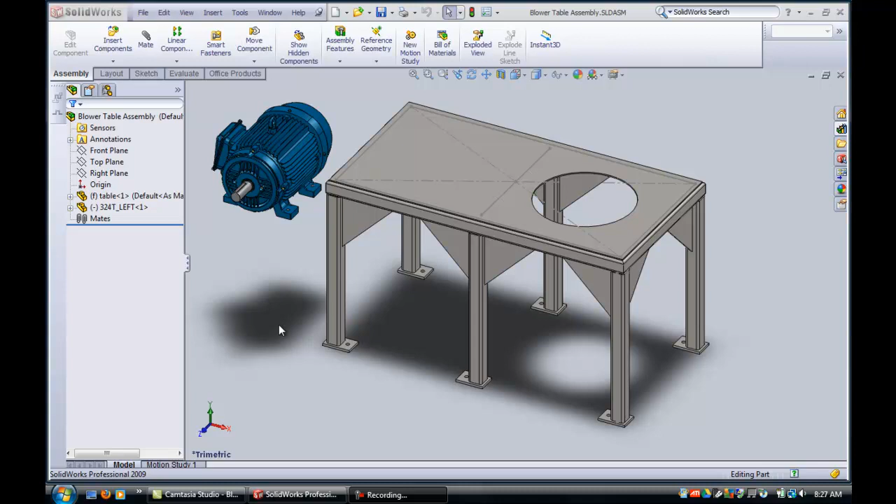Now, first thing we're going to need to do is find out what the measurements of the motor are for the bolt pattern. So I'll just quickly measure the bolt pattern of the motor, and we'll see we need 317.5 millimeters in one direction, and we need 100... and that didn't work very well. Let me just try that again, and remember to clear this time, and we get 266.7 millimeters in the other direction.

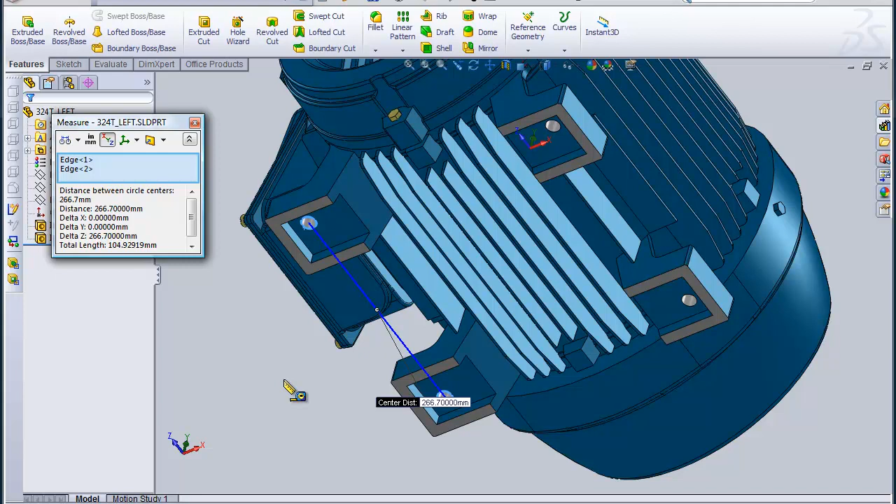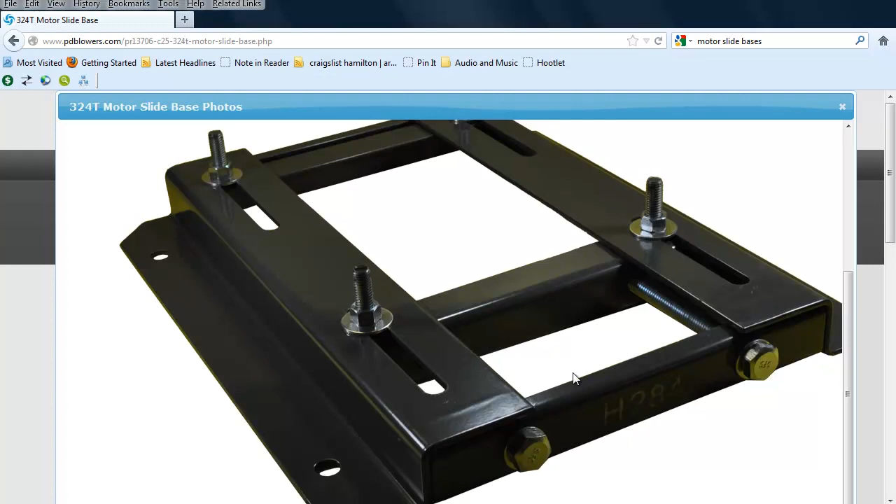Those probably translate to sensible inch dimensions. We'll find out soon enough. But in any case, that is relatively inexpensive, but I don't have a 3D model, so I'm going to have to create something to make use of in my assembly. So you can see that my motor dimension 317.5 millimeters is basically the center to center between these two bolts, so that's where my sliding has to take place. So I've got to start by modeling these Z-shaped pieces. Let's get started with that if we can.

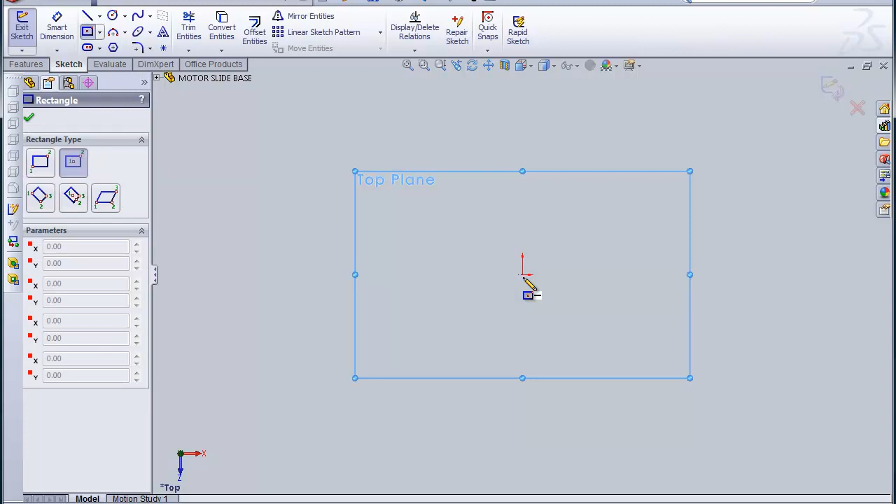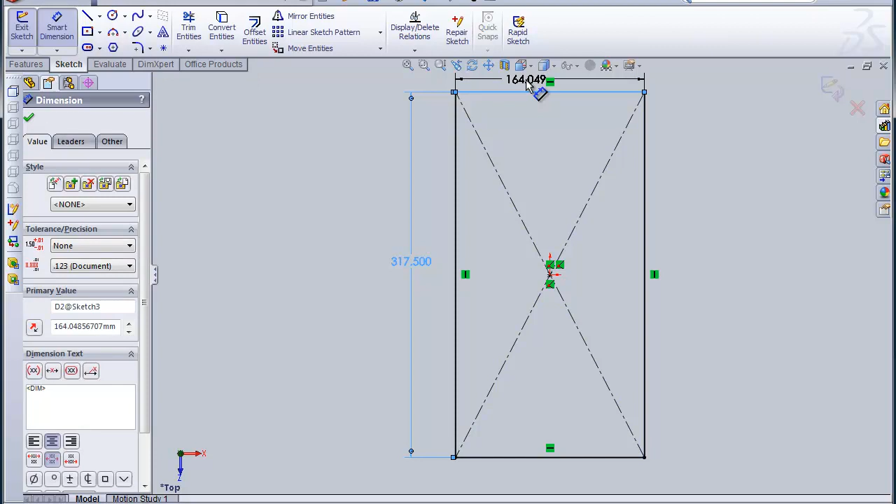Probably the easiest thing to do is to get on the top plane and just sketch a center rectangle and define that's going to be where my 317.5 dimension is. And that is going to be the other direction, which is 266.7 millimeters, and that gives me a framework for starting this base.

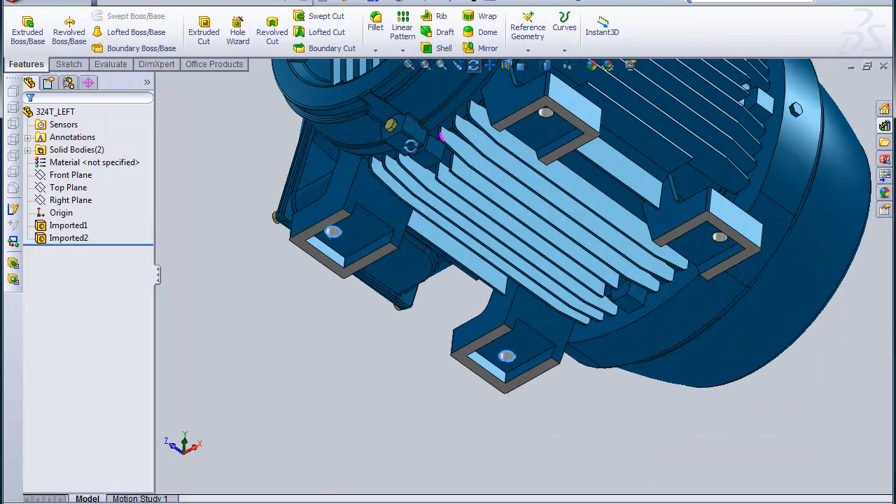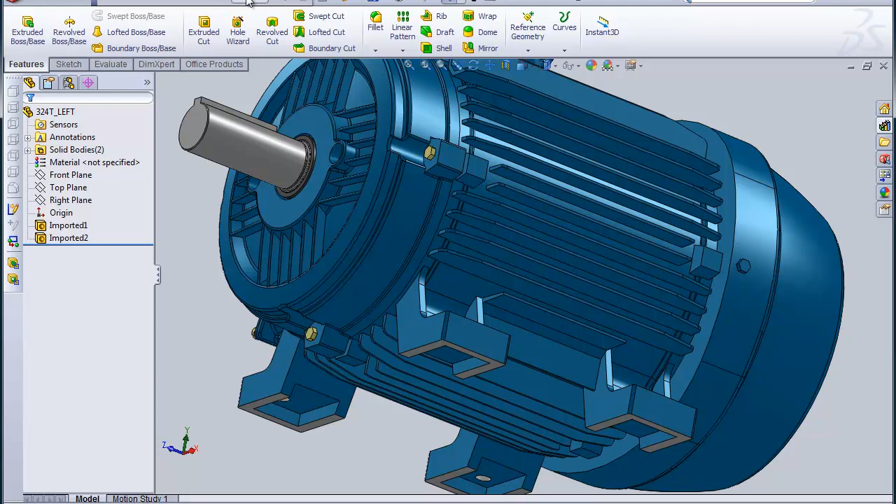So my sliding is going to take place along this line. I want to be able to slide the motor back and forth kind of like this, so I can tighten the belt. So that would be in the 317 millimeter dimension. So that's where my sliding has to take place. So that gives me an idea where to begin with my bracket line, and I need a slightly larger rectangle to define the outside of the base.

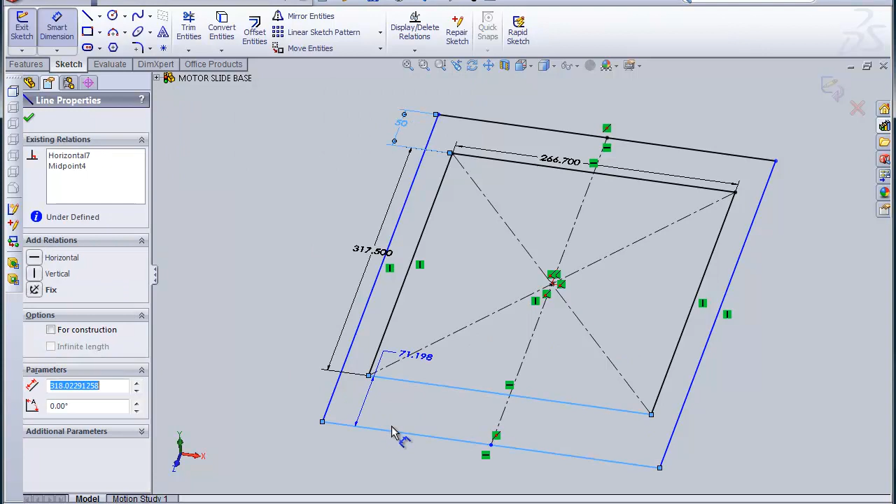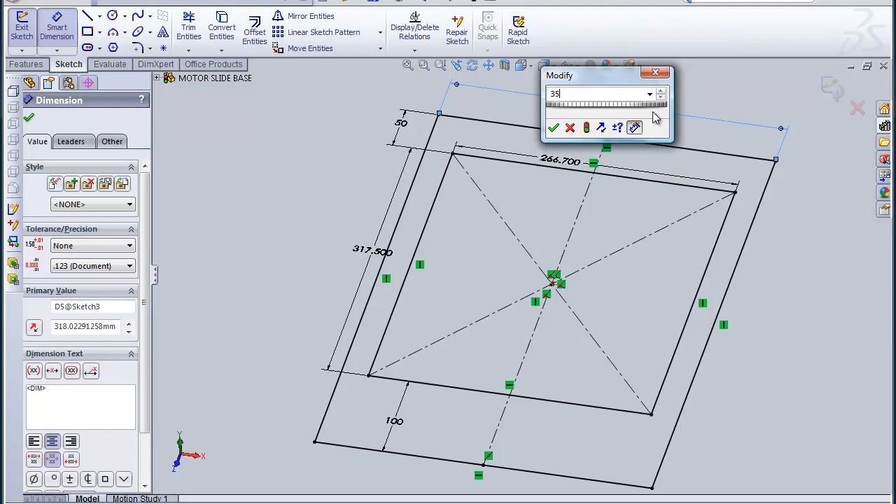So I'm going to need another rectangle, looks like that, and this is really just making a sketch to define the points I need to get started. So I'll just hit this line here and the origin, get those coincident, and later on I'm going to play with the dimensions a little bit. I'll just set this up as, say, 50, and need some room in the front for the adjustment screws, so we'll make this one say 100 millimeters. Okay, and the last thing I need is an overall width, and we'll make that something in the order of 300, 350 maybe. Everything's all black, so we can get going.

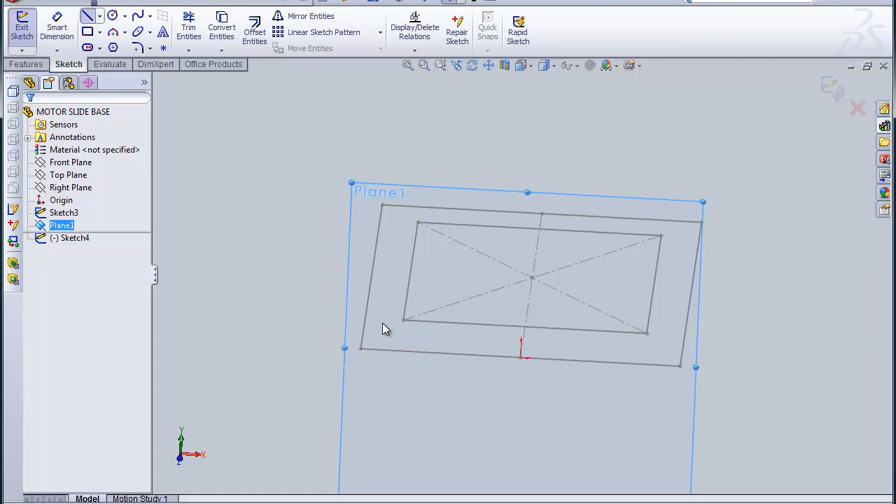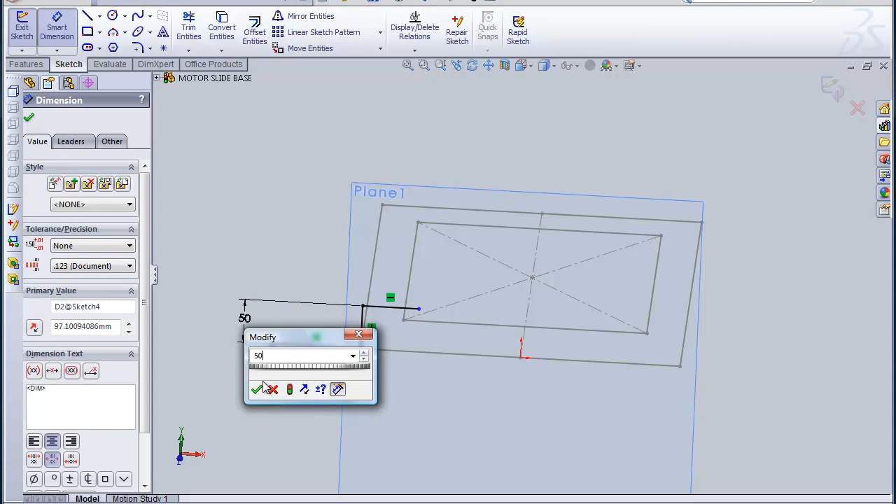Now, what I'm going to do is establish a plane off the front plane, insert reference geometry plane, and I'm going to pick that point there to define the front of my piece of metal, and sketch on that plane and draw the shape of the metal that I need. And that point there is going to be coincident. And my height looks to be about a couple of inches, or 50 millimeters or so. And about the same for the legs. And I'll make these different so that you can adjust them as required. Make them about 60.

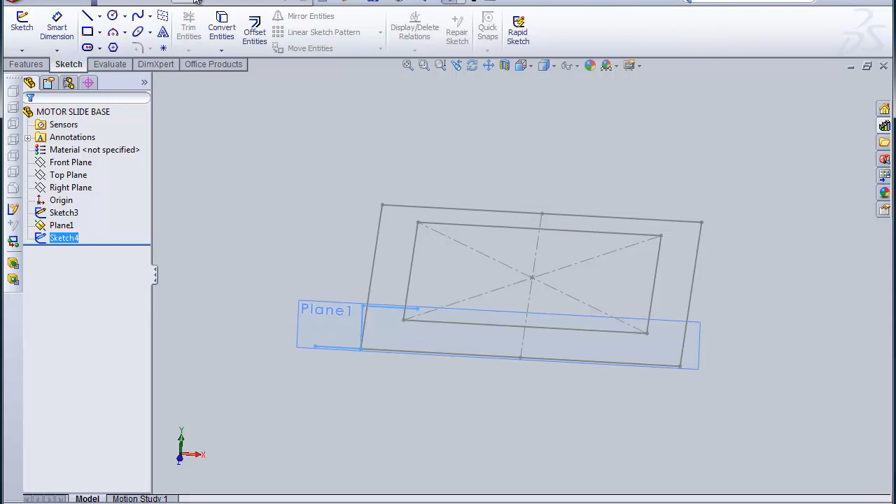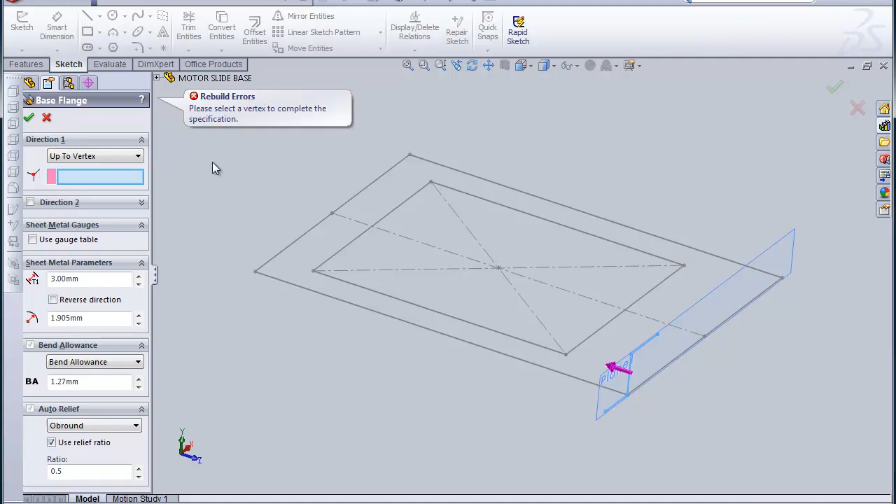Let's finish that off. Let's insert, it's going to be a sheet metal part, so that's a base flange. The thickness of this metal looks to be about 3 millimeters. And that looks good. And the length of this thing up to vertex, we can use that opposite end that we defined. There we go. So that gives me half of my motor base, and I'm going to put some slots in there. It's not quite long enough to line up properly. Let me just see here.

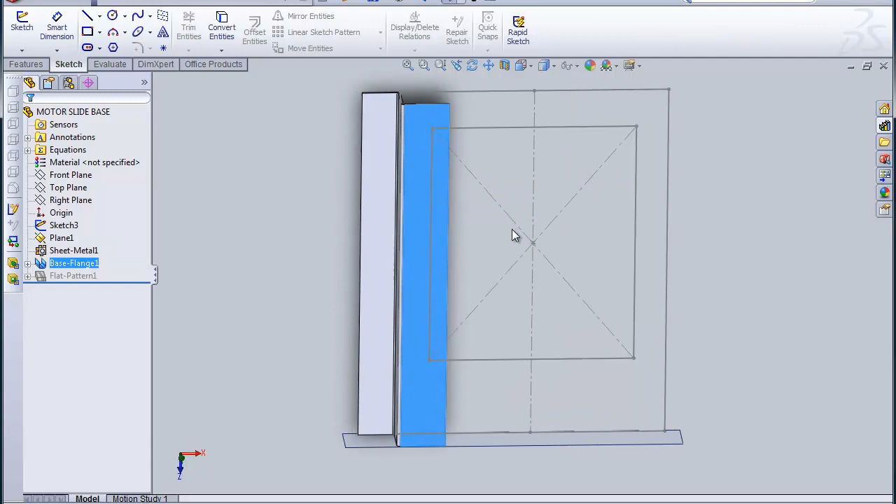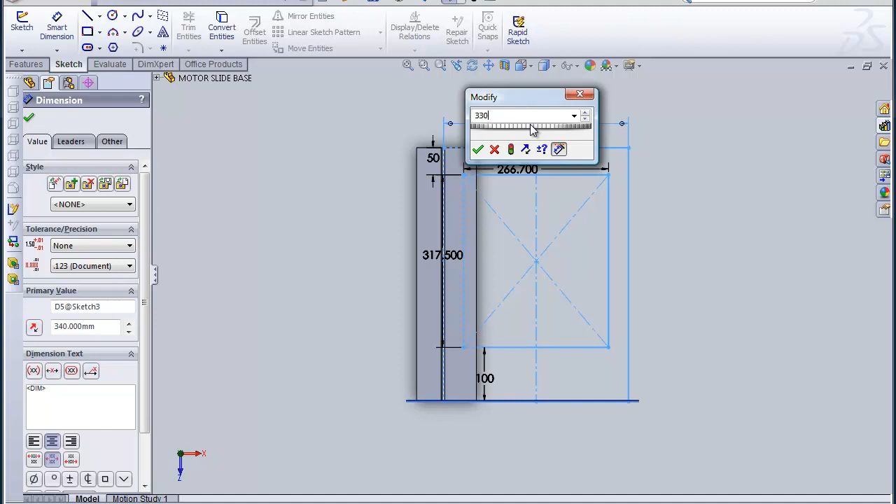If I go normal to that, that line really should be in the center. So if I modify my original sketch, I can probably take that down to, let's try 340 and see if that looks a little better. Could go even further. So let's try 330. Sort of refining it as I go, getting it to look the way I want. And that's starting to look like a good place for a slot.